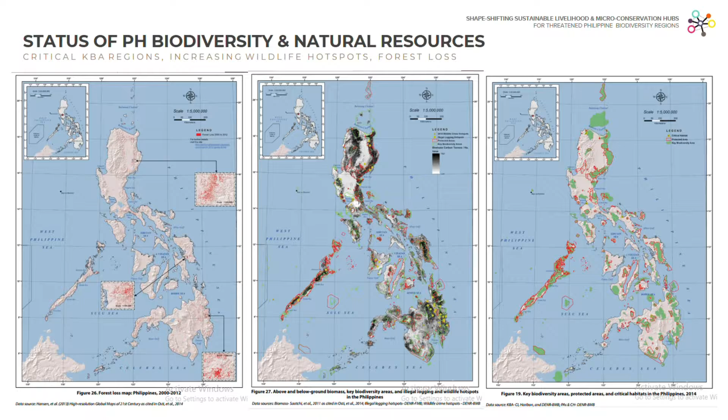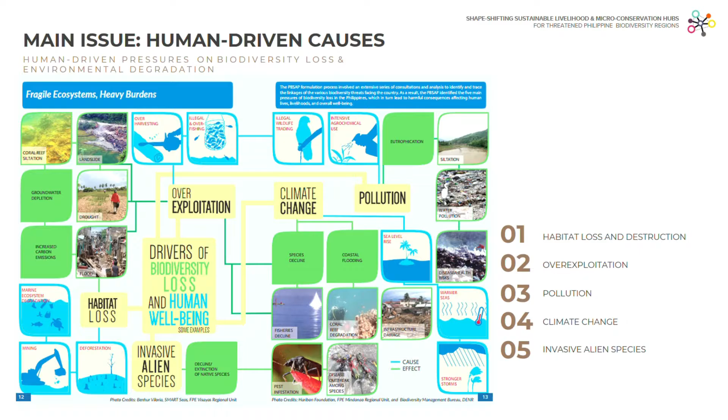To summarize, the five human causes of biodiversity loss include habitat loss and destruction, overexploitation and unsustainable use of resources, pollution, climate change, and invasive alien species, all of which are direct and indirect causes of irresponsible human actions.

In the past year, I have collected some of the alarming news related to illegal human interventions and the consequences they bring, especially during calamities and disasters, from GMA News, ABS-CBN News, Rappler, Oceana, and others.

The architectural solution. There is a call to address ineffective and destructive livelihood practices and to support insufficient conservation programs and campaigns through a linked architectural solution that can provide training and learning grounds for sustainable livelihood and microconservation. Through a three-pronged solution, local knowledge will work hand in hand with scientific knowledge to shift the relationship of humans with nature.

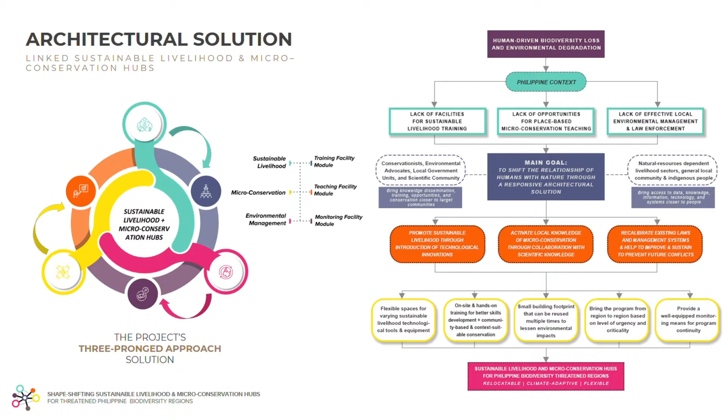This will be made possible by the provision of tech-driven, sustainable and smart livelihood skills training, and on-site and climate-adaptive microconservation facilities that can be transported to different threatened regions and rural communities of the country with varying ecosystems, topographic, climatic, and environmental conditions.

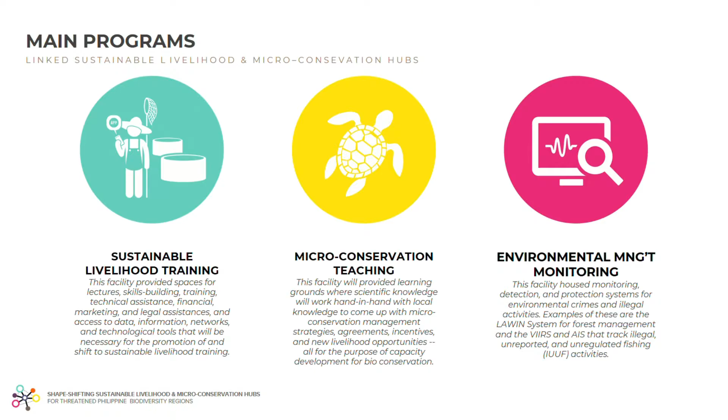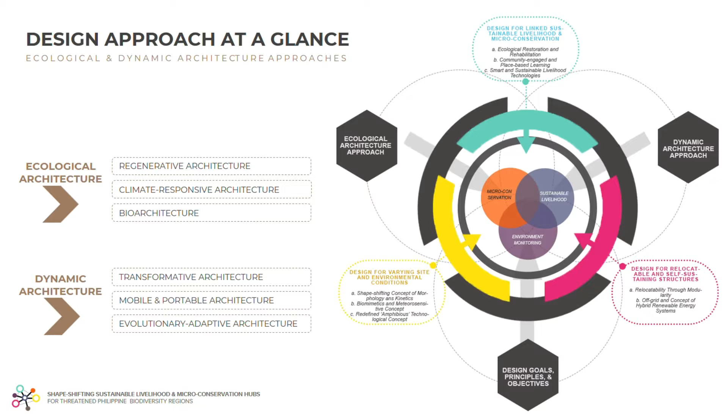The architectural design approach. With all these considerations, ecological architecture approaches, which include regenerative, climate responsive, and bioarchitecture, were used vis-a-vis dynamic architecture approaches, which include transformative, mobile and portable, and evolutionary adaptive architecture. Through the integration of issues, solutions, and approaches, a project execution framework was developed that will serve as the phases of the project in its future transfer.

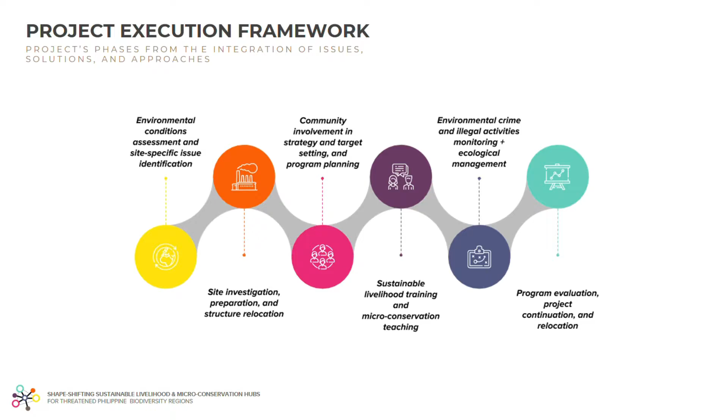From priority assessment, site investigations, community involvement, actual training and teaching, to environmental crime monitoring and success evaluation.

Selected site and analysis. Envisioned to be relocated, the project must first have its pilot site, which shall serve as the ground zero. Palawan, a biodiversity hotspot dubbed the last ecological frontier of the Philippines, was established as the site of intervention because it is home to 10 of the key biodiversity protected areas of the country and is vulnerable to countless environmental crimes.

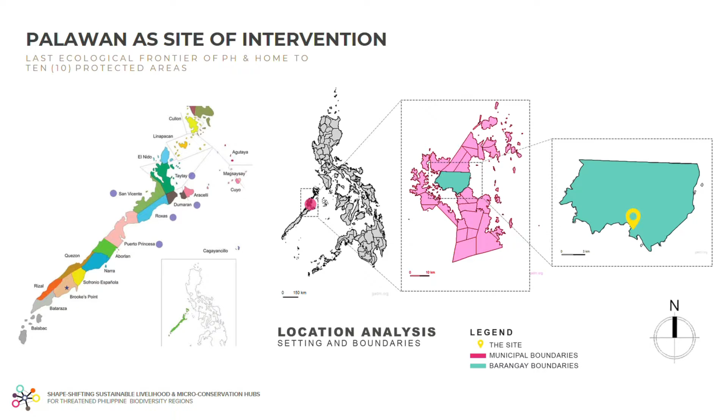From these 10 KBAs, the Malampaya Sound Protected Landscape and Seascape was chosen because of its relevance to the issues of destructive livelihoods, relevance to the site and ecosystem variations, and relevance to the communities that rely on its resources.

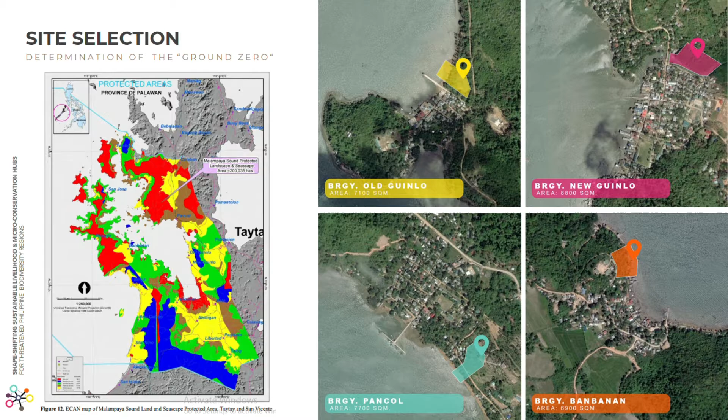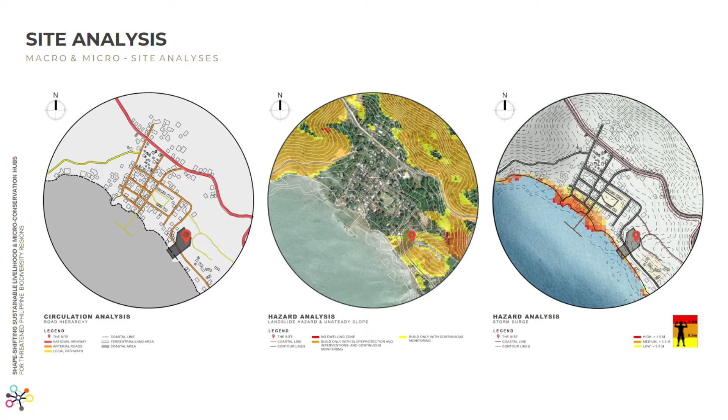Guided by several studies, a site evaluation criteria was formulated to assess the four sites that were determined, with Barangay Pancol being the most suitable. For future relocation, this series of site analysis must serve as a guide in determining site location and microstudies such as zoning, topographic, climatic, circulation, flood, and storm surge hazard analysis.

Further, the design approaches were then integrated to serve as the foundation for all the architectural processes that will take place from here.

Research-based and precedent-inspired design interventions and strategies were then applied accordingly until the core and support spaces that will make up the services of the structure to its users were generated.

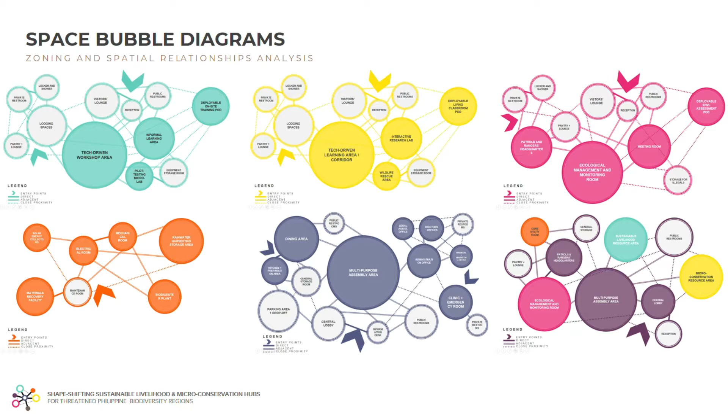From this, the qualitative and quantitative requirements of each space were detailed through a comprehensive space programming table. Shown here are some space bubble diagrams that were first individually created and then combined to produce an overall diagrammatic representation of the zoning and relationships of spaces.

Architectural Design Concept. In the process of developing the concept that will be the foundation of the project's design, form, and spatial relationships, the researcher devised several key concepts that directly and indirectly respond to the contextual issues and are in line with the dynamic and ecological design approaches that were established.

From these 10 strategies, the key concepts that were complementary to each other were identified and grouped to form a recurring theme leading to the three main design concepts: first, modifiable interconnectivity, which strengthens the project's adaptability and flexibility; second, nature-shaped design, reflected in the project's site planning and physical design features; and third, intentional transition, which helps integrate technological-based, sustainable, and future-proof solutions.

Using the three main design concepts, the researcher explored the links that connect these three to come up with concepts for the design of the hubs and deployable units' architectural form and structural features. This includes design for disassembly or DFD, the project's ability to facilitate future changes, dismantlement and reassembly, and the swarm intelligence observed in nature, which mirrors modular units that work individually through design space but collectively form the hubs, contributing significantly to the community.

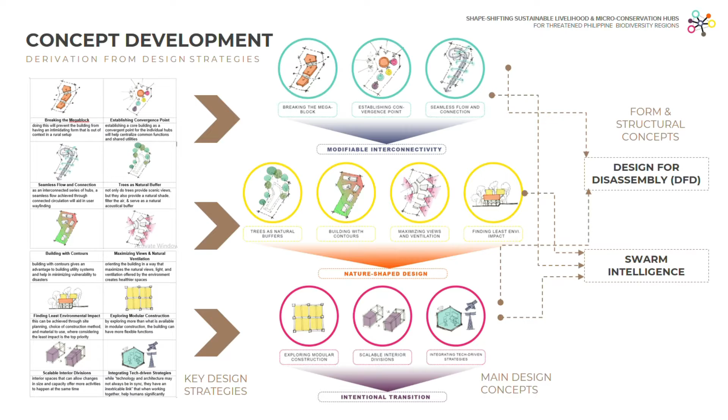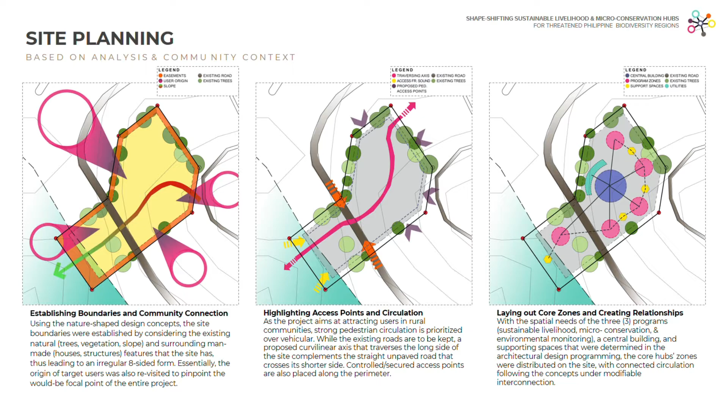Schematic design. From the main concepts that were formed, these were then interpreted into complete schematic designs by translating them architecturally and spatially into the project's macro to micro components, from site planning to massing and model studies. Here are the three main components of site planning based on the physical and local community contexts.

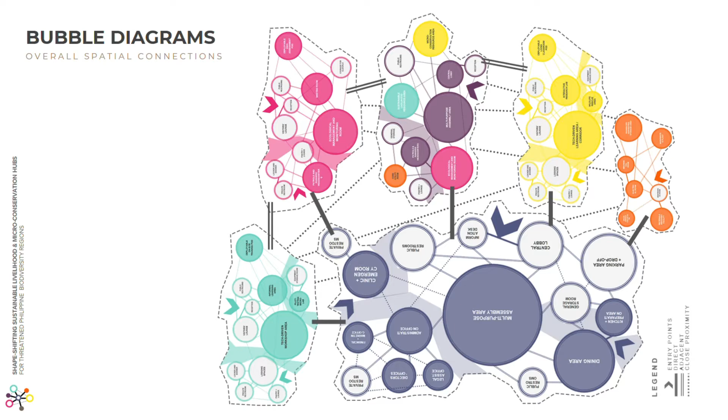In terms of massing and zoning, several configurations were explored based on the individual hub's needs and their rationale. U configuration for the Sustainable Livelihood Hub exhibits maximum interaction among spaces. Free-form configuration for micro-conservation teaching gives an explorative setup, especially for young learners. C configuration for environmental monitoring opens a wider view scope for surveillance.

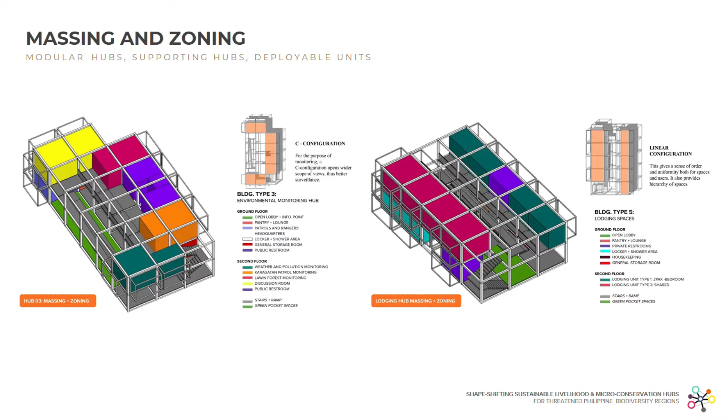Linear configuration for lodging spaces gives a sense of order and uniformity, and polygonal central support allows multi-edges for connections. Lastly, hexagons of nature feature structural stability for deployable units and were useful for surface tension on water-based sites.

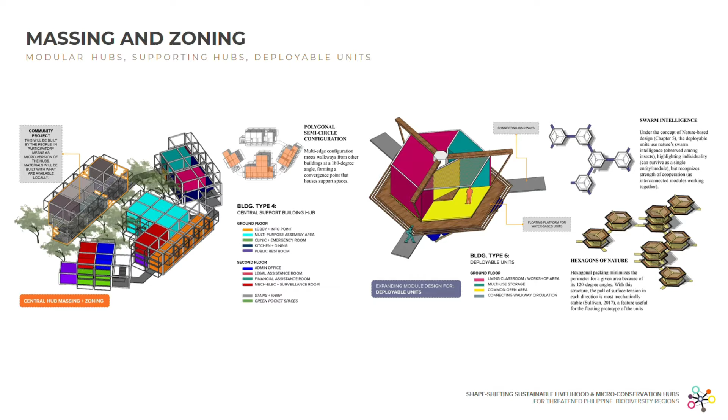Final architectural design. The discussion of the final design will start from the large-scale design down to the small-scale modular unit design. In terms of the site development plan, shown in this slide are the three main hubs, support hubs, and deployable units positioned in the two lots of the site divided by the Taytay El Nido Road. Each hub was strategically positioned based on its functions, spatial relation, privacy, and hierarchy, and are all connected to the central support hub, which shall serve as a convergence point and facilitator of seamless flow of circulation.

Unpaved pedestrian paths serve as the ground access, and elevated walkways connect the upper level of the hubs in the gradually sloping site. Lodging spaces hubs were placed at the more private area of the site, and the environmental monitoring hub was placed at a more visible area.

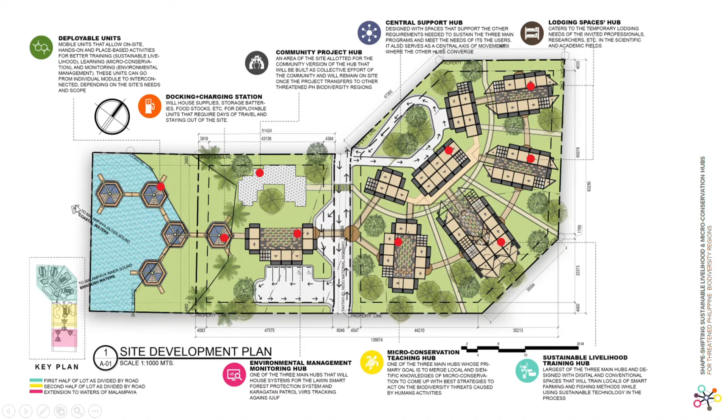The deployable units sprawl on the extension of the site to the waters of Malampaya Sound, ready to be deployed to the inner sound, outer sound, and agricultural areas. Here is an aerial perspective of the site at the chosen ground zero.

For future relocation, several configurations of the modular hubs and deployable units were formulated, each with its own advantages and disadvantages depending on the physical and environmental contexts of the target site.

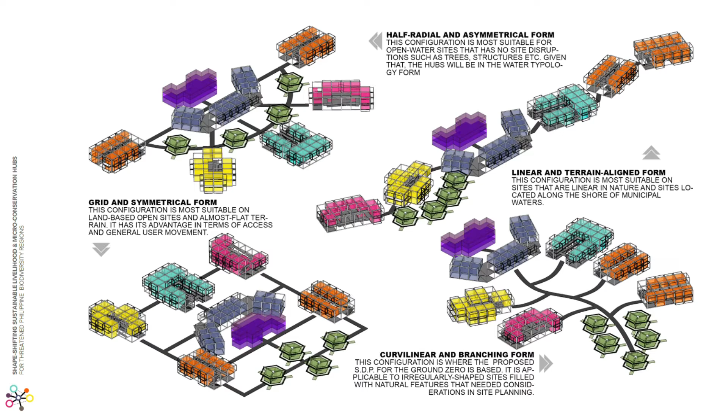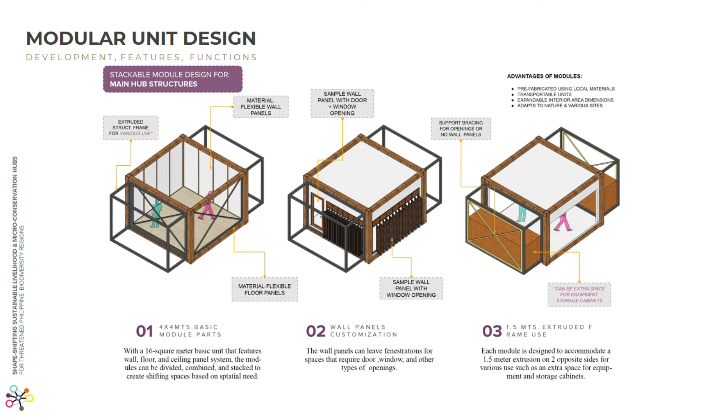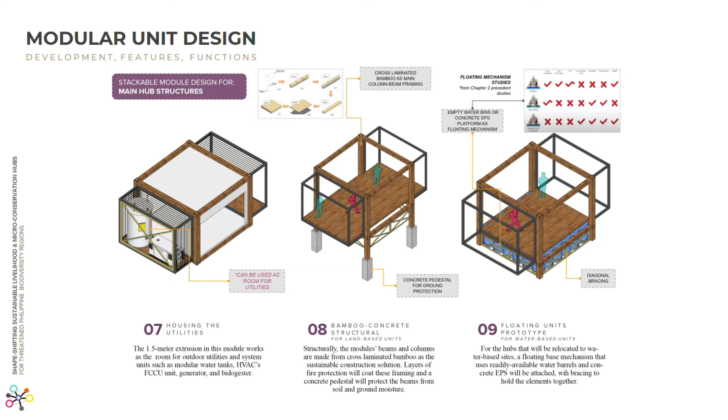Modular unit design. Comprising the two-level hubs are the stackable modules that use panel systems for easy disassembly, primarily made up of bamboo, steel, and concrete. From the 4x4 meter area developed an extrusion for various uses such as inner corridors, additional space for storage, frame for the facade, and room for outdoor utilities.

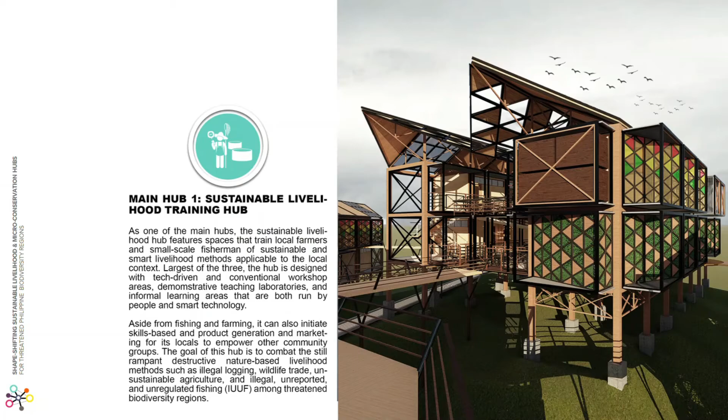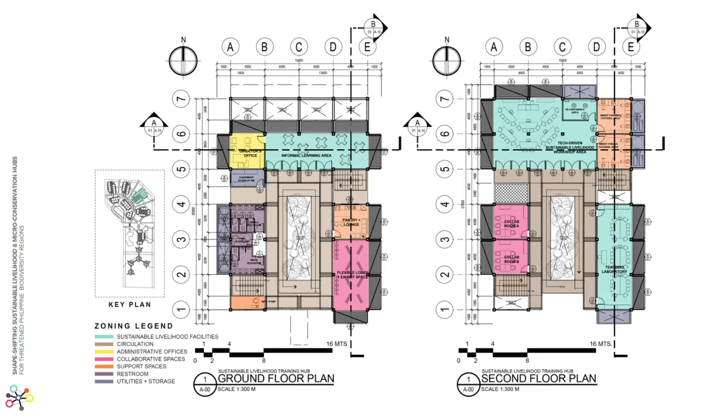Main modular hubs. Proceeding with the main modular hubs, the first main hub is a sustainable livelihood training hub that features spaces that train local farmers and small-scale fisher folks in sustainable and smart livelihood methods applicable to their local context. Largest of the three, the hub is designed with tech-driven and conventional workshop areas, demonstrative teaching laboratories for equipment testing, and informal learning areas that are both run by people and smart technology.

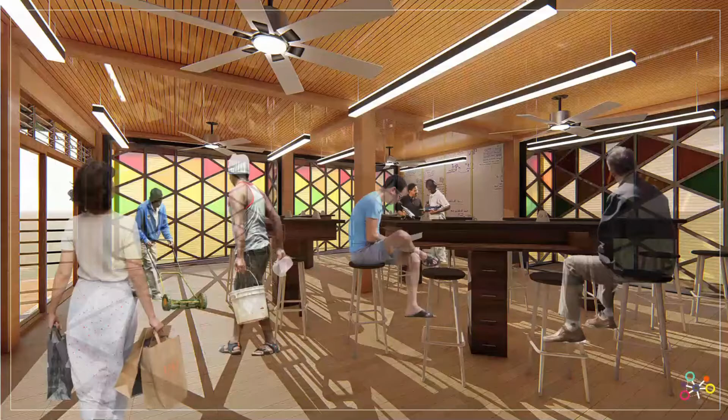Aside from fishing and farming, it can also initiate skills-based and product marketing for its locals to empower other community groups. Here is an interior perspective of the workshop area and the informal learning area that initiates dialogues among community members to formulate better livelihood strategies.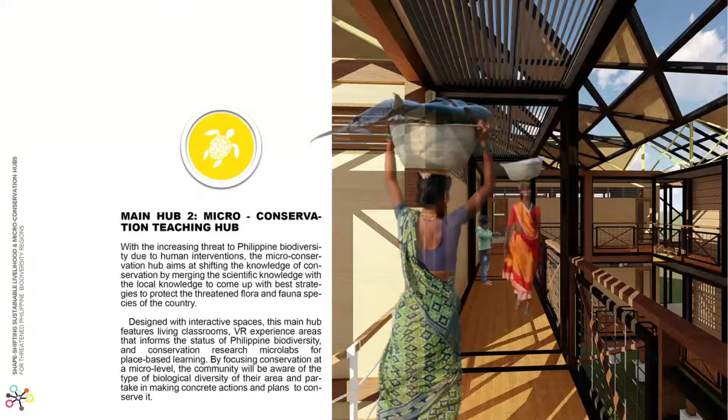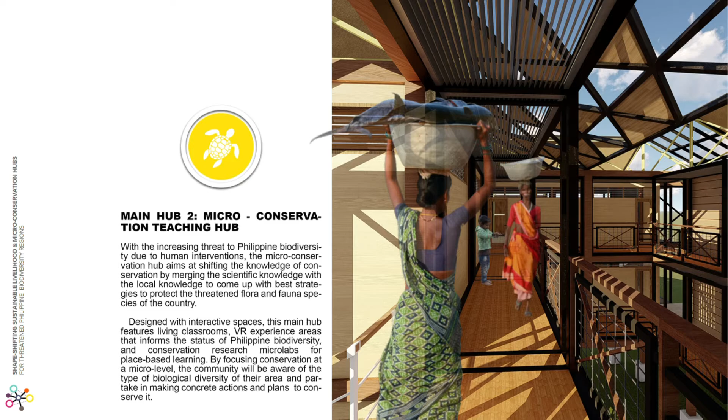The second main hub is the micro-conservation teaching hub that aims at activating the local knowledge of place-based conservation by merging with scientific knowledge to come up with the best strategies to protect the threatened flora and fauna of the country. Designed with interactive spaces, this main hub features living classrooms, VR experience areas that inform the status of Philippine biodiversity, and conservation research microlabs.

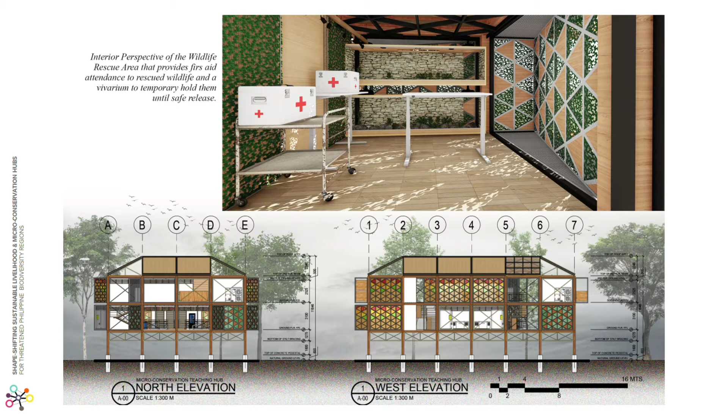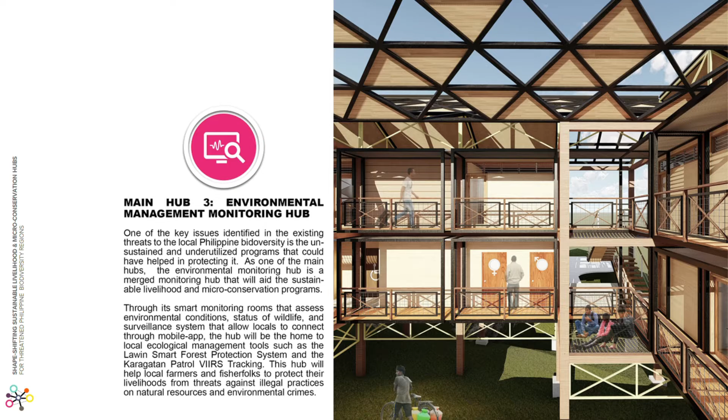As one of the main hubs, the Environmental Management Hub is a merged monitoring hub that will aid the sustainable livelihood and micro-conservation programs.

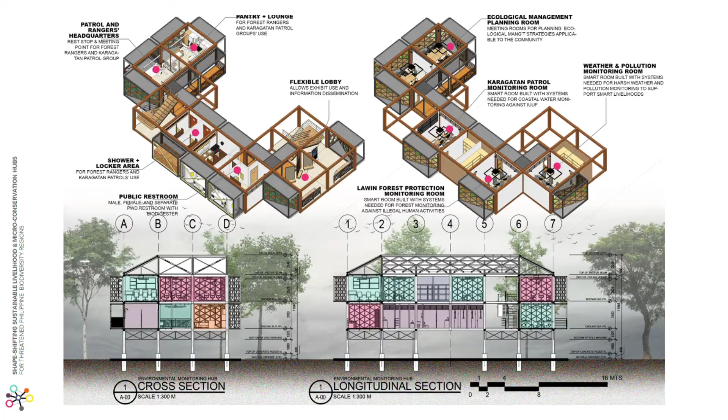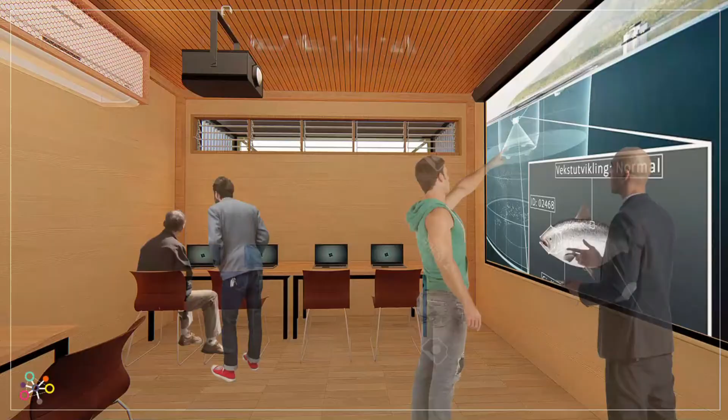Through its smart monitoring rooms that assess environmental conditions, the status of wildlife, and the surveillance system that allows locals to connect through mobile apps, the hub will be the home to local ecological management tools. This hub will help local farmers and fisher folks protect their livelihoods from threats against illegal practices on natural resources and environmental crimes. Here is an interior perspective of the Karagatan Patrol's VIIRS monitoring hub against illegal, unregulated, and unreported fishing, and the computer tutorial room for smart fishing monitoring software tools.

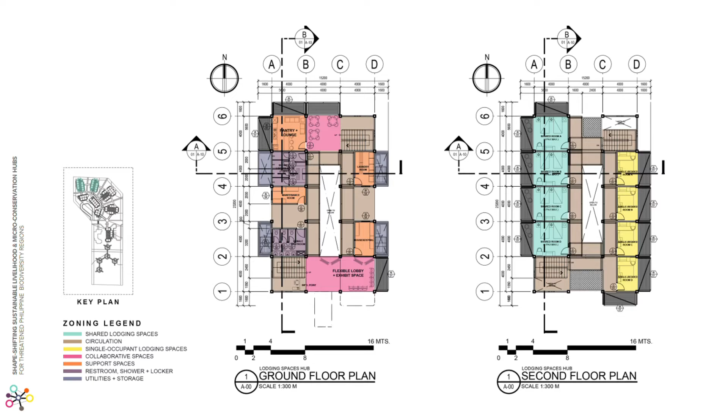The support hubs. Moving forward, the project also features two support hubs that will cater to the needs of the three main hubs. First are the lodging hubs that will address the accommodation needs of the invited local and international scientists, trainers, researchers, and the like. Housekeeping spaces and necessities were also integrated to achieve and maintain user comfort.

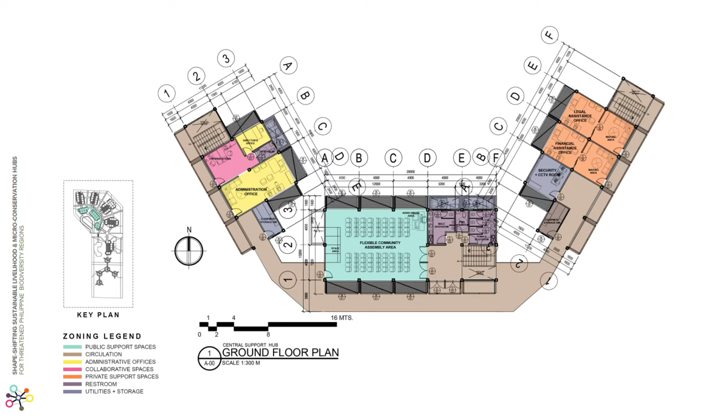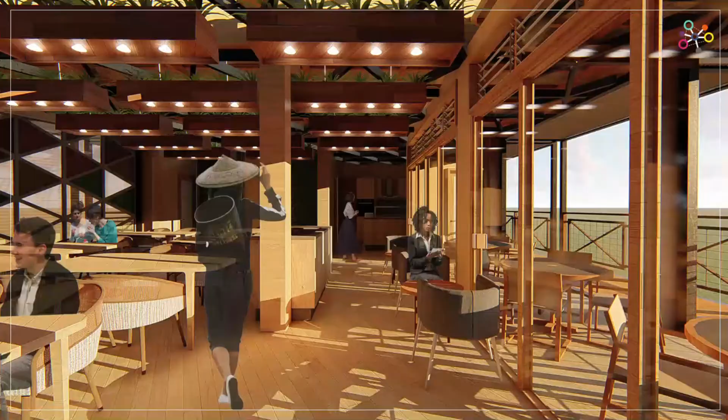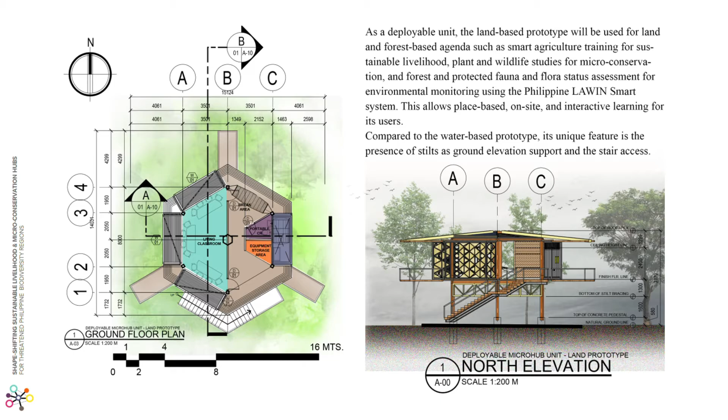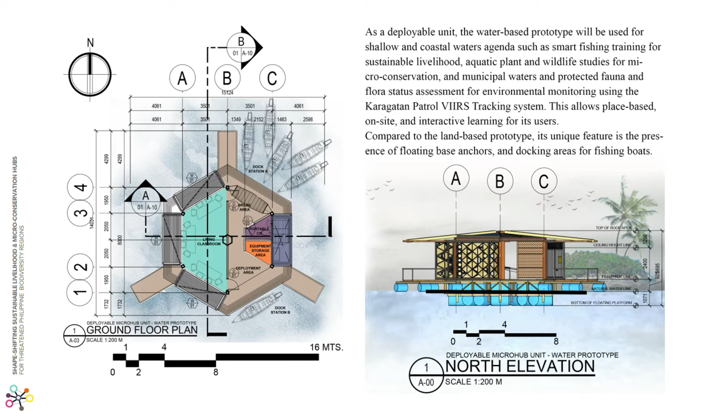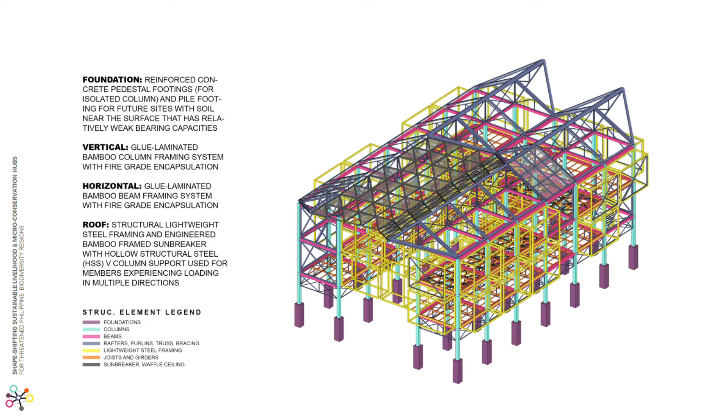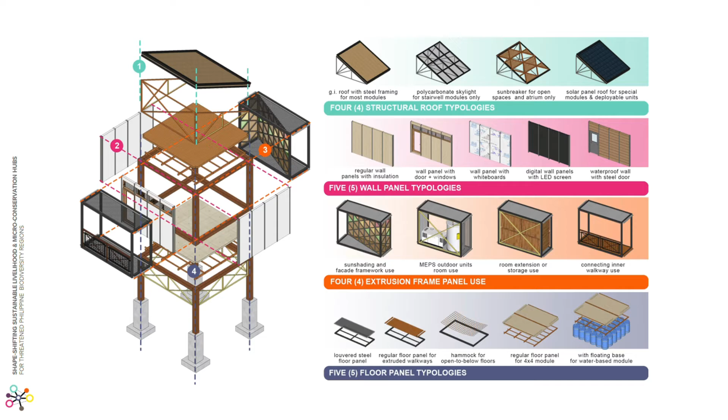Structural design. Structurally, the project is made up of bamboo, engineered in various forms for various applications, and structural lightweight steels for framing. Several typologies and panel systems were used to form the hubs, ranging from the roof that has 4 types, wall panels that has 5 types, extrusion frame that has 4 primary uses, and 5 types of floor panels depending on the space requirements.

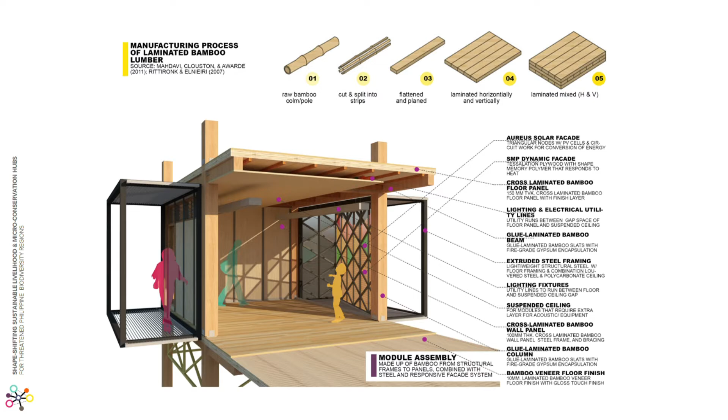Accordingly, the beams and columns of the hubs were made from glue-laminated bamboo, the walls were a product of bamboo cross-lamination, and floor finishes also feature bamboo veneer as shown in the module assembly detail. Details of connections were also provided along with the fire-grade gypsum encapsulation and concrete column pedestal for fire and ground moisture protection respectively.

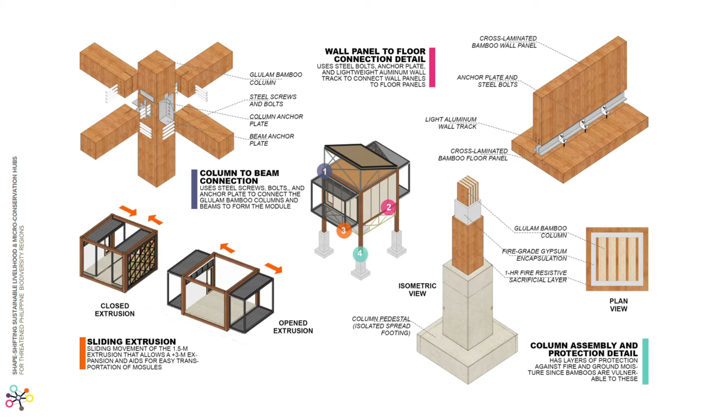Thriving in a tropical climate, a responsive dynamic facade that also uses a panel system was integrated to address the varying microclimates of each region. Designed with triangular nodes in a gliding frame for sun orientation, each panel can be reassigned and repositioned manually based on room temperature, energy, and ventilation requirements. The project innovatively used recently recognized AuREUS solar windows that use agricultural crop waste to harness energy from the sun by a young Filipino inventor, and shape memory polymers that respond to changes in light, heat, and humidity.

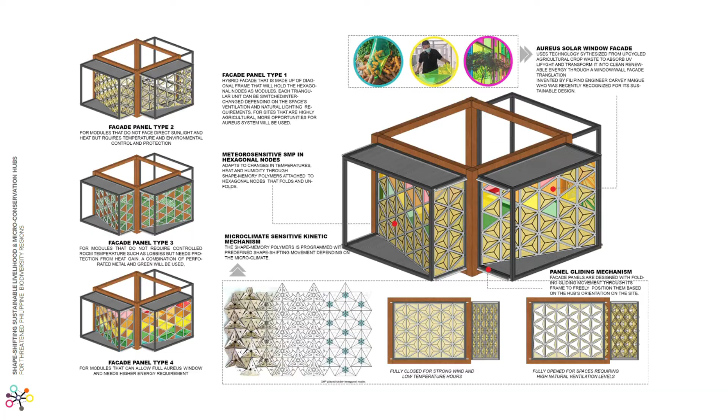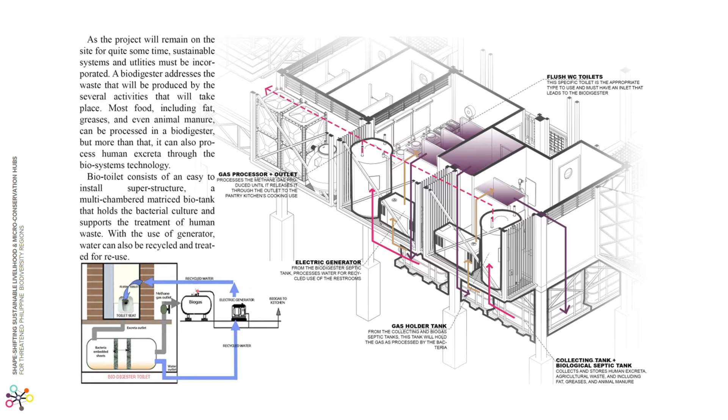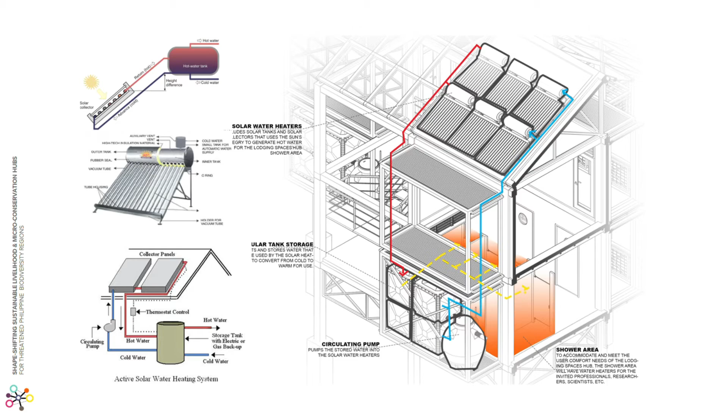Mechanical, electrical, plumbing, and sanitary systems. To ensure the project's overall sustainability and survivability, several MEPs and other building systems were used to sustain its energy and other needs. These include a built-in biodigester system that converts agricultural and human waste to gas for cooking, an HVAC system for specific spaces that require artificial ventilation, which uses lesser ducting works, solar water heaters for the lodging spaces, shower areas, and rainwater harvesting with water filtration and UV treatment tools for gray and clean water uses.

The Community Project. Throughout the duration of the hub's stay in the threatened region, the community will also come up, plan, design, and build their microversion of the hubs. As the hubs will be transferred to other target sites, the community project will remain with them to ensure the continuity of the programs and oversee its implementation.

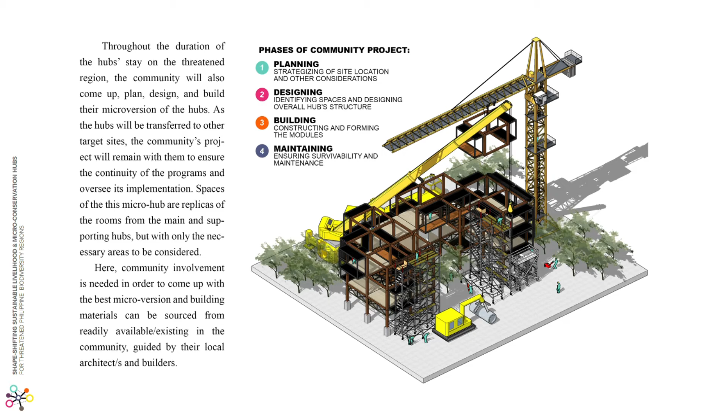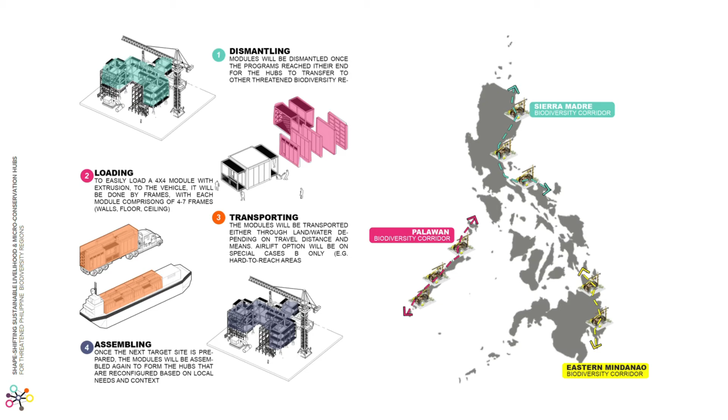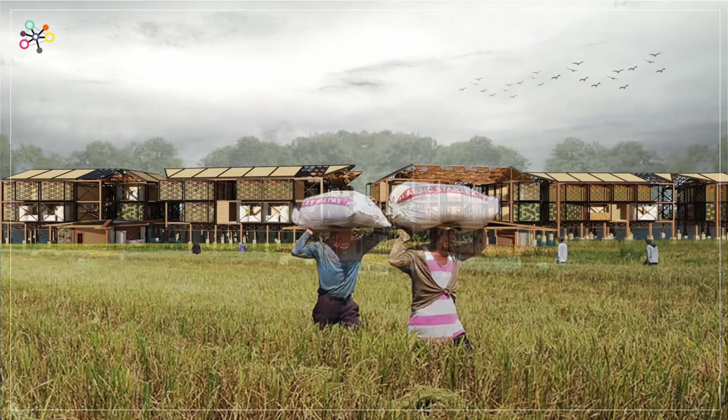The project's future application. Here is a photorealistic visualization of the hubs as they thrive and address issues in a fishing village and coastal communities, teaching smart livelihood alternatives among Philippine agricultural communities, and helping in restoring abandoned mangroves in lake communities.

We often visualize a future that is fast-paced and extremely advanced in an urban city with a sci-fi-like setting. But to many of our impoverished rural communities, this is not always the case. I would like to dedicate this project to one of the poorest sectors in the Philippines, our local farmers and small-scale fisher folks. For the abused natural environment and resources that shield us against disasters. For the security and resilience of our neglected rural communities. And for the future of the Filipino people.